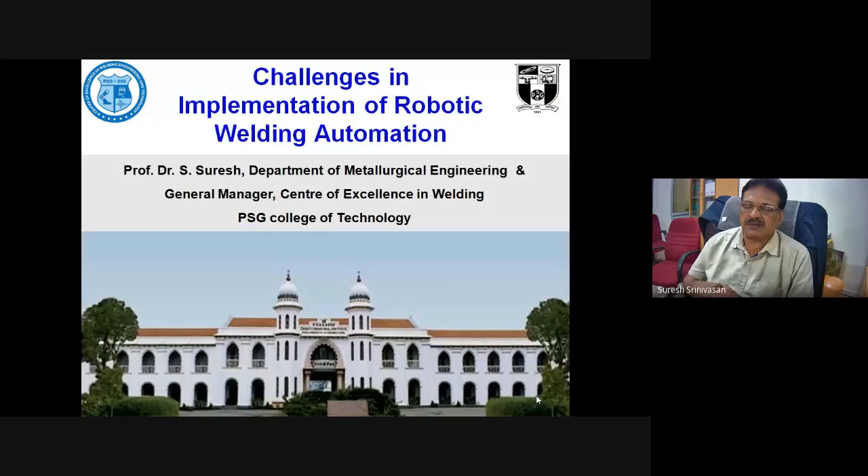In the first part, I'm going to cover the basics, what are all the real factors that we have to consider while we go ahead for implementing robotic automation. So a very brief introduction of our Center of Excellence.

It was a project of Government of India started by PSG College of Technology, wherein three departments are having their tenure. One is the Robotic Automation Engineering Department, headed by Professor Dr. Vinod. I think you would have heard his lecture on the first day.

The second is Professor Sundaram, who heads the EEE Electrical Engineering Department. And third is the Metallurgical Engineering Department head, Dr. J. Krishnamurthy, who is also heading this metallurgy division or metallurgy department.

So I am serving from the industry side as a head for completely installation of all equipments and serving the industry, academics, faculty, and so on. This project was about 27 crores funding, 21 crores coming from government, and 6 crores coming from industries, including PSG industries and so on.

So now we have all the latest welding equipments. I am showing you only the automation equipments. As you see on the slide, we have a gantry robo with both TIG and MIG heads, wherein you could do any kind of experiment.

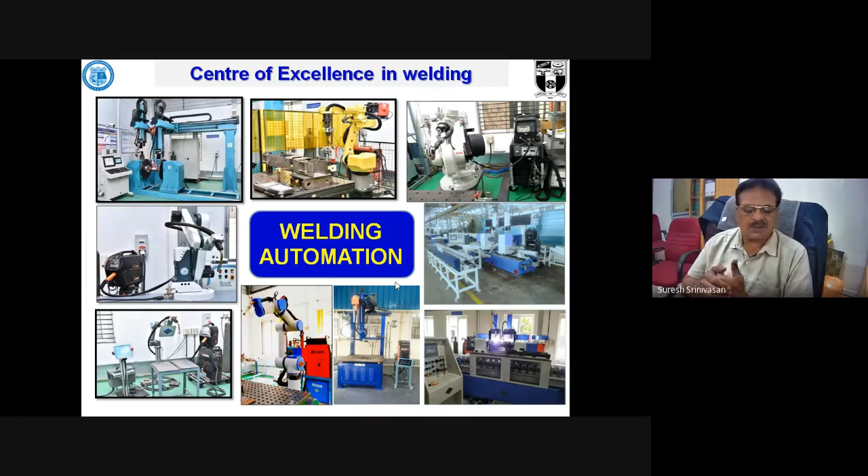Of the other two machines we have built, one is for TIG welding, another for MIG welding of cylindrical jobs, wherein you can do cylindrical welding, linear welding, curvilinear welding, and so on. These are some of the facilities in our center, open to you for usage for your students, projects, etc. We also have several other evaluation and testing equipments. As you see on the left side, is everybody able to see my cursor?

On the left side, you see RoboDK, RobotStudio, and RoboGuide. These are the three simulation packages which we use before we go into an industrial robotic automation product. We run the product through this simulation package to check for interferences, total welding time, movement time, etc. We also have the SysWeld software, which is a finite element software for complete prediction and simulation of welding.

On the next, in the middle, you see three simulation jobs: one for butt welding, another for a T-joint with fillet welding, and the third an actual missile component, where you can do an exact simulation of welding and optimize the parameters to minimize distortion, residual stresses, etc. So the central SysWeld package is for numerical simulation, and the left side is for robo simulation.

On the right side, you see a physical simulation equipment called Gleeble. This is one of the unique features, a very expensive 6 crore equipment which we have in our center, where industry, academia, researchers, and research labs can use it for physical simulation of welding, heat treatment, post-weld heat treatment, hardening, tempering, and effect of tempering. All these can be studied in a small material sample representative of a big job. This is widely used for foundries, casting industries, and welding industries, for simulating heat affected zones, welding, etc. These are some of the research facilities that faculty members, students, and projectants can make use of in our center.

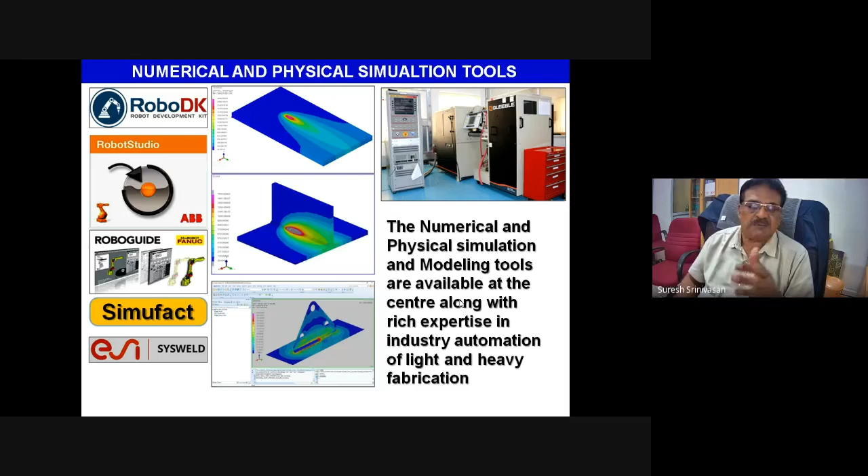Now let us plunge into our robotic welding automation. I think all of you have already become quite wise in knowing what a robot is, what automation is, etc. So I'll quickly pass through these things, as you have already heard quite a lot about this.

As you know, robotic welding makes up about 29% of all robotic applications. If you take 100% of robotic automation, some are for pick and place, some for spraying, some for painting, some for assembly, and 29% of those applications constitute the welding quantum, topped only by robotic material handling. So the number one major application is robotic handling, and the next is robotic welding, which occupies number two in the rank of robotic applications.

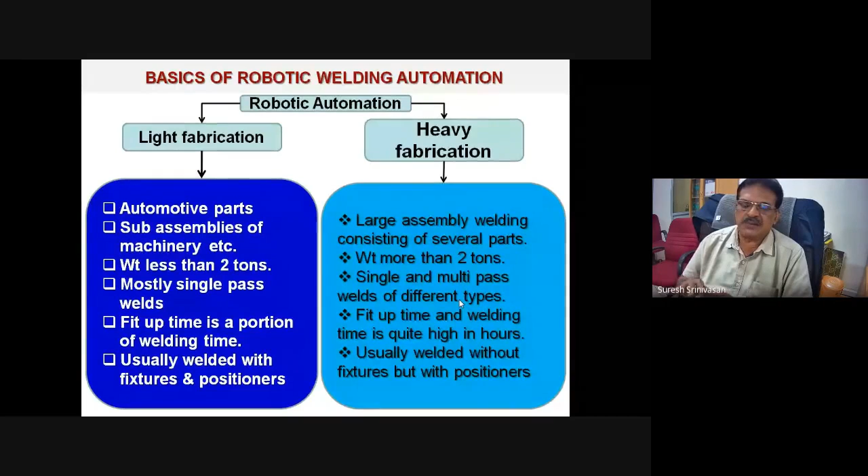Generally, heavy fabrication is welded without fixtures, but with some positioners. When you weld without fixtures, you require really smart systems with a lot of subsystems to overcome the use of fixtures. We'll go into the details as early as possible. But remember, with respect to welding automation, you have to understand and appreciate many small operations involved in production. For example, there are 9 major operations in any automation.

First, we have to load the parts. We have to locate the part in its respective position in the fixture. Then we have to clamp it before welding. Then we have to tack them so that when you turn the job, they don't fall off.

Then you do the welding, then you have to unclamp the assembly. When you do the unclamping, because welding is a unique process, after the weld solidifies, it shrinks. So the assembly may shrink to a little extent, and it may be difficult to remove the assembly from the fixture. So you got to have a plan for this.

Then you can unload it, and further finishing operations and loading of the next part is how the automation goes. Now, if you look at all these operations, when it's done by a man, a welder, a fitter and a group, we call it manual welding. Whereas out of these operations, when some of them can be done with the man and with some fixture, we call it semi-automation. Whereas when you come to fully automated welding, most of them are done by machine and a fixture.

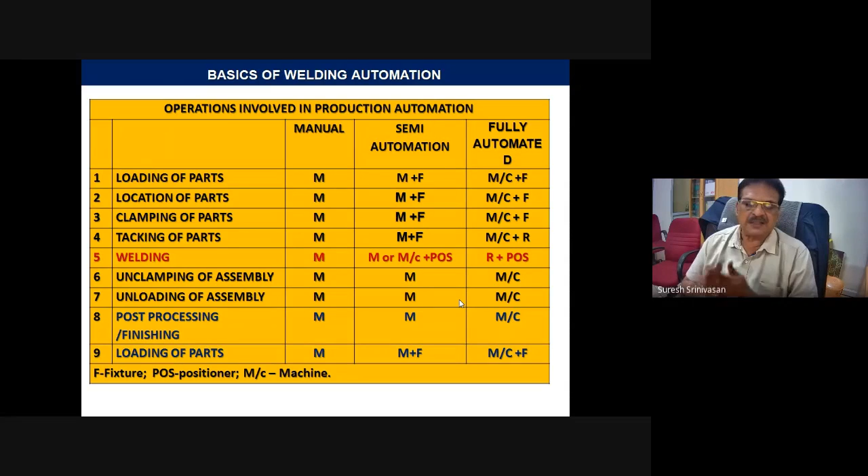So when you go for semi-automation, the man with the fixture is the combination here. And when you come to automatic welding, the man, the welder, the machine and the positioner all play a role. So that means the man machine interface is very, very critical in a fully automated setup.

And if you look at it in further details, there are about 16 steps. If you look at it closely, there are 4 ways in which welding can be done, called type of welding: manual, semi-automatic, mechanized and automatic. So when you say manual, it's very clear.

All the operations like setting up parameters, positioning of the torch, starting of the torch, stabilization of the arc length, maintaining the filler wire rate, guiding the arc - all these operations are done by man, who is a skilled operator.

Whereas if you come to semi-automatic, some of the functions are taken over by the power source, which is a smarter power source today, and the power source program. Very often today, digital power sources come with programs where you don't have to repeat the setting every time. The programs can be instructed, and the program can memorize and apply this program of parameters.

When you come to mechanized, the mechanization helps you guide the torch, position the job, etc., so that welding is done in a more comfortable position.

And when it comes to automatic, what we mean is that as welding progresses, when there are disturbances in the root gap, in the arc length, or in terms of sharp corners, etc., the machine, robot or sensors sense these things and automatically correct the parameters, making it fully automatic. So when you say automatic, the machine should have the intelligence to sense the disturbing factor, take feedback from the real situation, make automatic corrections within a split second, and apply them to the torch, the positioner or the robot such that the welding quality is maintained perfectly.

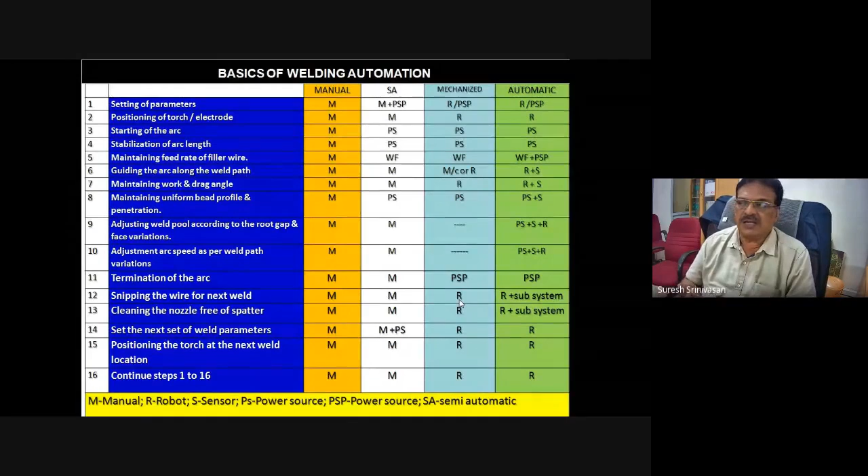So this is what we mean by automation. When it comes to automation, you can have either a special purpose machine or robotic welding automation. In fact, robotic welding gives you several advantages that you don't get with a special purpose machine, though all these things are available even in an SPM, a special purpose machine.

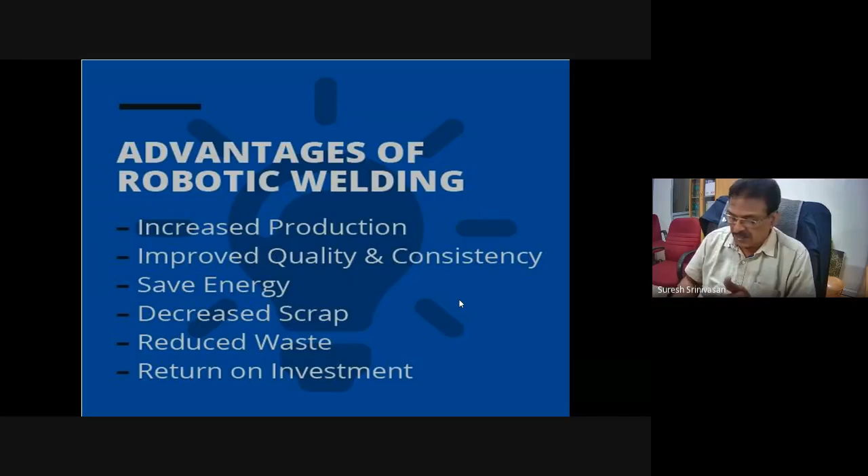The most interesting thing is that it gives you very high flexibility, so any type of job can be done within a few hours of learning and application, compared to SPMs which are customized and tailor-made. The advantages of robotic automation are fewer mistakes, higher production velocity or speed, robots can work 24 hours, all 7 days without breaks, and robots have the highest arc time, or arc-on time as we call it.

Here you have to understand that whenever you do mechanization or automation, when you come to manual welding, you should appreciate that if a welder takes an electrode and starts welding, at maximum an electrode of 450 mm standard length burns for about 1.5 to 2 minutes. So after 2 minutes of welding, he has to change the rod, remove his helmet, and clean the job free of spatter, etc. So he takes another 2 to 3 minutes to do this handling.

Again he starts. So practically for every 2 minutes of welding, he has 3 minutes of unproductive time. If you add these two, it becomes 5. 2 by 5 gives you roughly about 40% arc time. So the production is achieved only as long as the arc is on. When the arc is off, you don't get any deposition, you don't get any welding, you don't get any production.

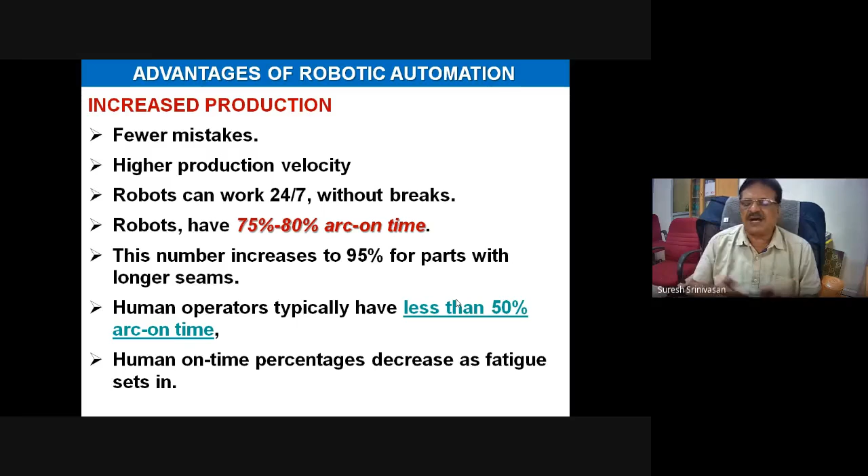So this is the crux of the issue in automation. Secondly, because it's a machine, there is no fatigue of handling the torch several times, going to the same location and repeatedly welding. So your fatigue is absent, and you get improved quality in robotic welding. In fact, I would say more than quality, you get consistency and accuracy in robotic welding.

The quality of welding not only depends on robo, but on many factors which you're going to see shortly. So I would say from my experience, this robotic automation gives you high consistency and accuracy of welding, because the robot places the quality weld in the same spot repeatedly without any fatigue every time. And the precision of these systems also reduces spattering, resulting in neater seams, lesser post-cleaning, and so on.

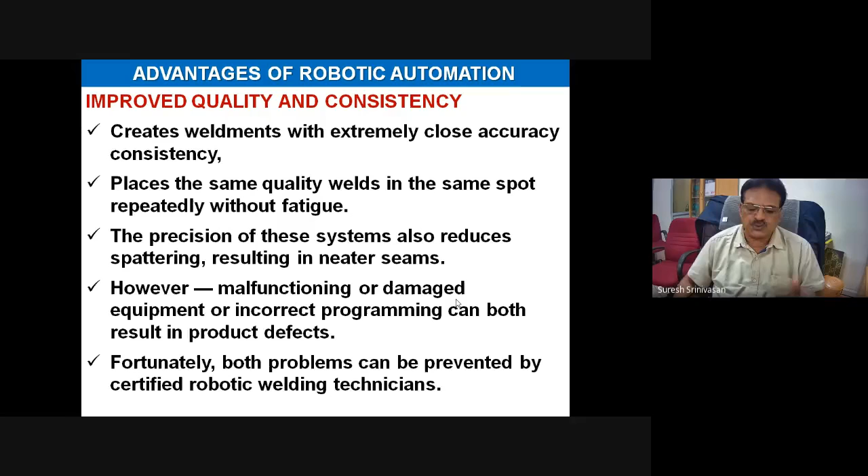Please remember, all these statements are true only when there is no malfunctioning or damaged equipment or incorrect programming. All these things are eliminated from the scene. So if proper programming is done, a good fixture is available, and there is no malfunctioning, then whatever the previous three statements are true. Fortunately, all these issues can be prevented by certified robotic welding technicians and operators. Incidentally, our Center and Robotic Automation Engineering Department also gives training to any robot operator with which he can easily do the robotic automation. Next one is saving of energy.

It conserves a lot of energy by running consistently, cutting the energy-expensive startups, and they do not overweld, and they do a consistent quality weld. When they do not overweld, the filler material wastage is prevented, so energy for welding is also minimized, and they reduce the need for corrective welding.

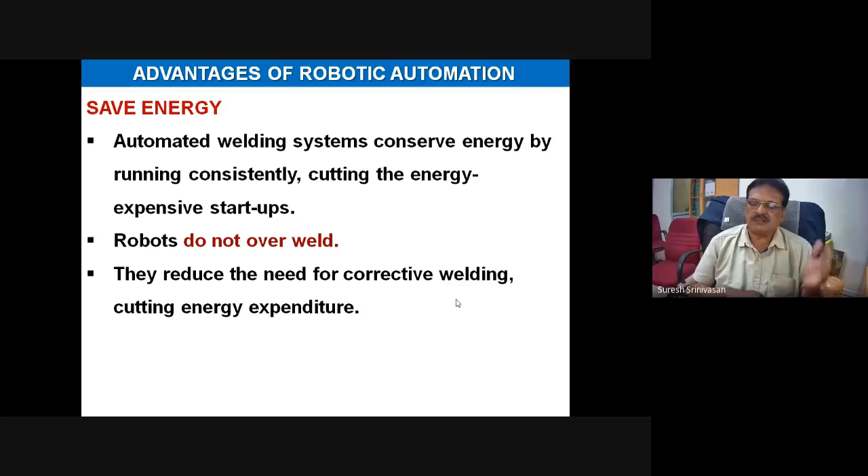Now, rework percentages. For example, if you take manual welding, you get a rework percentage of 10 to 15%. When you come to mechanization, you can get around 5 to 10%. When you go to robotic automation, this rework can be reduced to below 5%. So there is a drastic reduction in rework from 15% to below 5%. That is another great saving for your automation, and reduced wastage.

When you have increased welding speeds and minimize excess energy, it increases the lifespan of consumable equipments, like you have a lot of accessories like guiding torch guides, contact tubes, etc. And consumables are yet another source of wastage. Consumables in robotic welding includes nozzles, guide rolls, guide tubes, etc., which have relatively short lifespans that are replaced after a number of uses.

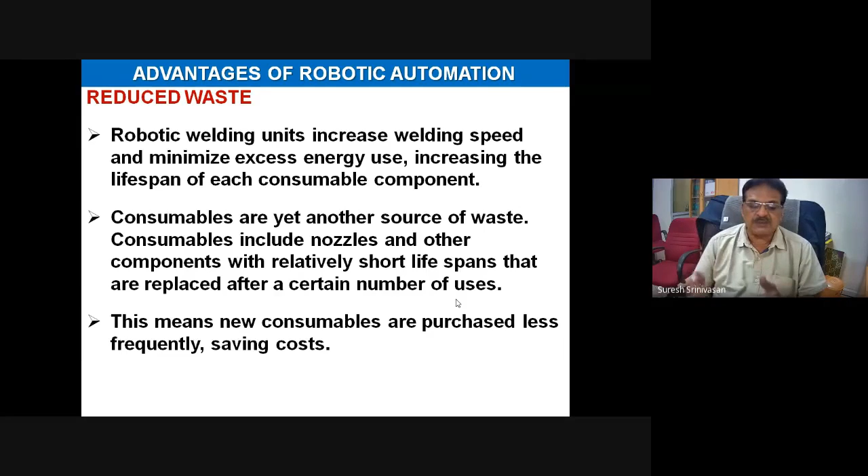In fact, consumables, remember, in welding, consumable costs 3 to 5 times the cost of a base material. So every kg of consumable material saved gives you a big advantage in terms of cash outflow. This means consumables are purchased less frequently, saving costs.

Return on investment. Finally, why should we go for robotic automation? The efficiency, accuracy, and cost savings — all three give you a very big advantage, and it is more than the initial setup cost, which could be high. The combination of greater speeds, higher quality welds, and decreased scrap all gives you a quick return on investment. It increases further when you consider reduced energy costs, minimize chances of overwelding.

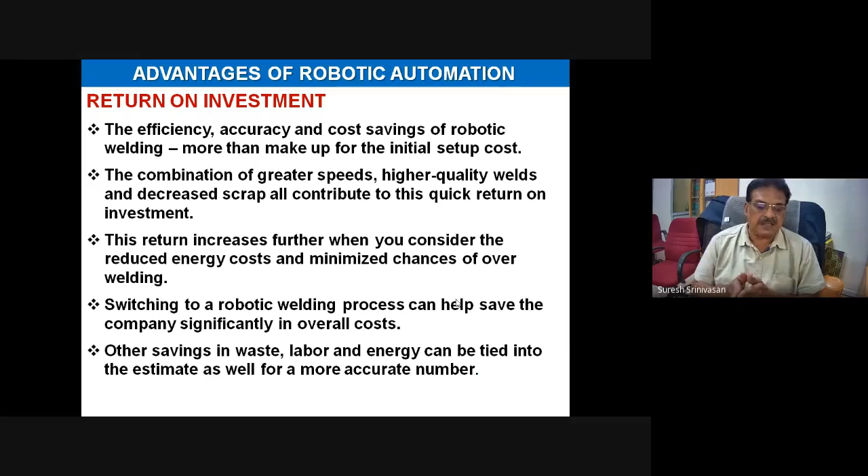Switching to a robotic welding process can help save the company significantly in cost, and other costs, of course, include labor, energy, etc., which are tied to this.

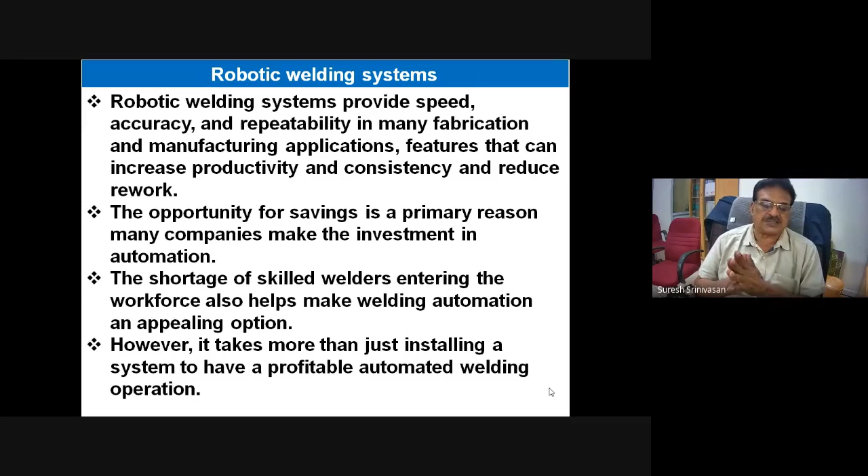One simple solution is to replace the welders with a robotic welding system. You can easily operate the welding system with an engineer - you no longer need a skilled welder, so you are free from such issues. But it takes more than just installing a system to have a profitable welding operation.

Now let us look at the various systems in a robotic welding automation setup. Number one on top is the robot. The next is the robot - we have to integrate a welding power source with the robot. Next, we need peripherals to assist robotic welding. These three are essentials for a basic robot.

If you want a smart or intelligent robot, as intelligent as a skilled welder, you require sensors. So all these are on the right side. Going in the clockwise direction: the robot, power source, peripherals and sensors. These are all part of the robotic welding system.

The next requirement is a fixture - this is for the job, and it varies from one job to another. The right side four remain constant with any type of application, whereas the fixture varies from one component to another, one assembly to another. So fixtures have to be customized for the specific application or job.

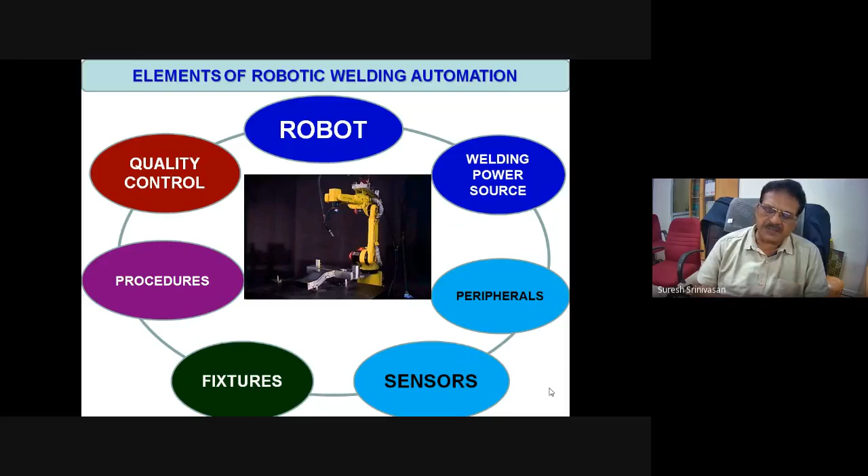Of course, zero defect is our destination, which any industry wants to achieve. It is something like perfection, and it depends on so many factors like material, consumable, parameter settings, sequence, etc. The quality control function is compatible with robotic systems because rework percentages are reduced to less than 5%. The quality control task itself becomes easy, the manpower for quality reduces, and the cost of quality reduces with robotic welding automation.

Now let us go one by one. The welding robot - you would have already heard about this for the past 3 days. You have floor mounted robots, side mounted robots, gantry mounted robots, hanging robots on the gantry, side mounted gantry, etc.

Generally, a robot is specified in terms of length, height, and width, or what you call the reach or sweep of the robot on the fixture or table on which the component is clamped. The reach of the robot is to be chosen to cover maximum weld locations in the assembly. Sometimes if the robot reach is not adequate, we may have to reset the component twice, and lots of errors can occur here. So when you select the robot for a given set of assemblies, you have to be very careful in deciding the specification of the robot reach so that all planned components can be welded.

The next issue in welding is payload of the robots. For example, TIG welding, MIG welding, CMT welding, and today many new welding processes have emerged, some involving specialized torches. These torches weigh anywhere from 1 kg to 10 kgs, including specialized torches along with filler wire feeding guides - these hardwares could vary from 1 kg to 10 kg. So the payload of the robot for welding is normally between 5 to 15 kgs, so that any type of torch can be handled in the system.

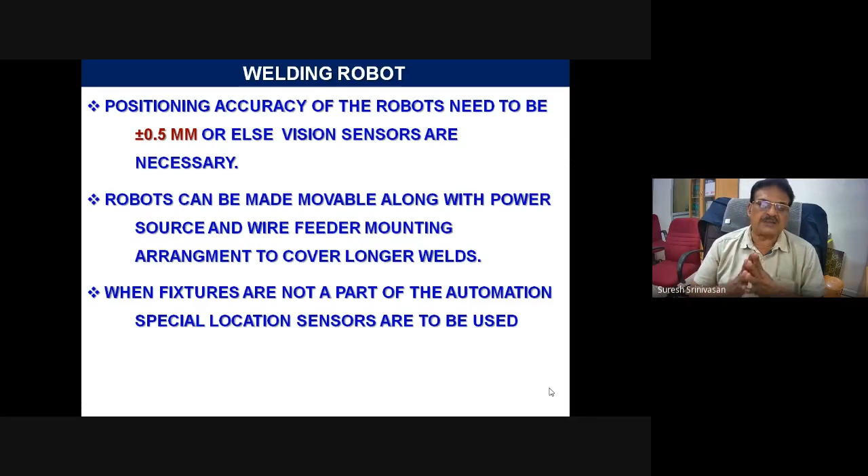Thirdly, when fixtures are not part of the automation - suppose you don't want to use a fixture - remember, special location sensors are to be used. We'll come to that in detail as we go along.

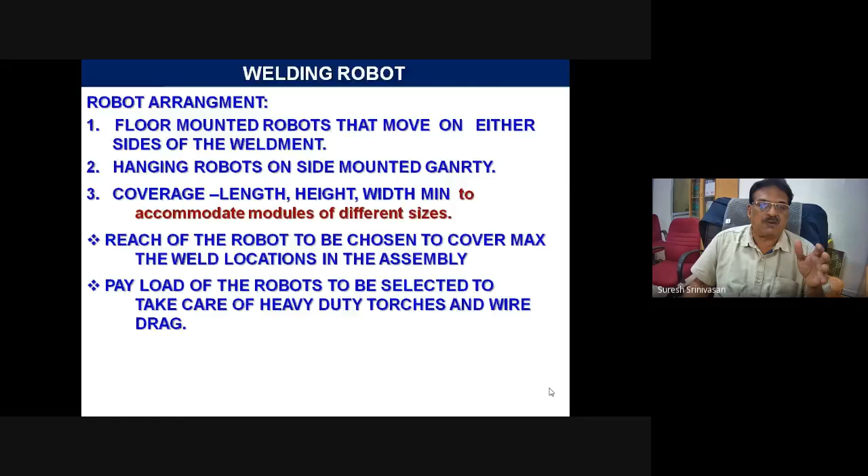Now, with respect to special requirements of the robot, we have seen two slides. Now coming to power source - you have already heard the lecture by Dr. Murugan, who is an expert in gas metal arc welding. You would have already heard about the basics and the processes involved in robotic welding, which today includes GMAW, GTAW, plasma welding, and so on.

Now coming to GMAW - this is the process widely used in industry for robotic welding automation. About 80% of arc welding robots use this GMAW process. This gas metal arc welding process refers to the use of both inert and active gas, or a mixture of active and inert gas combinations. When you use only an inert gas, we call it MIG welding. When you use a mixture gas or CO2, we call it MAG welding - so this gas metal arc welding covers both active gas and inert gas for shielding.

When you buy or specify a power source for robotic welding, remember the robot can work 24/7 continuously with a high arc time of 75 to 80%. So your power source must be 100% duty cycle. Generally, power sources are designed for 60% duty cycle, meaning you can operate for 6 minutes with a rest of 4 minutes—6 plus 4 is the cycle time, so 6/10 or 60% is the duty cycle. Whereas in robotic automation, since arc-on time can be 80% or even 90%, we need a welding power source with 100% duty cycle.

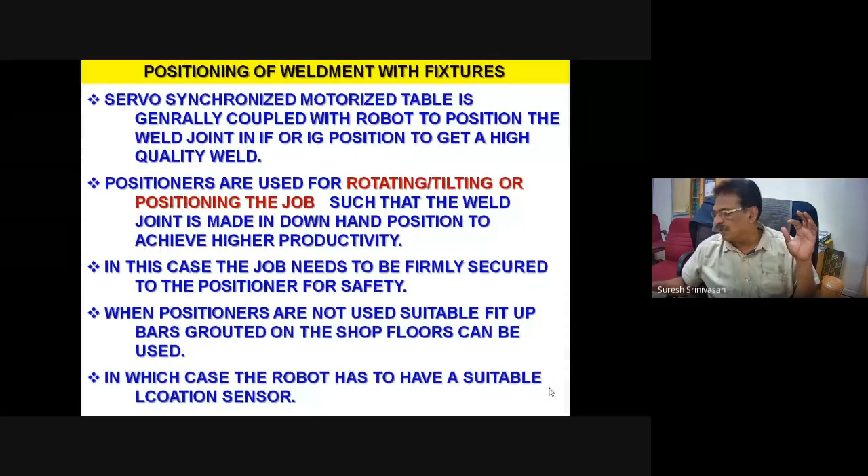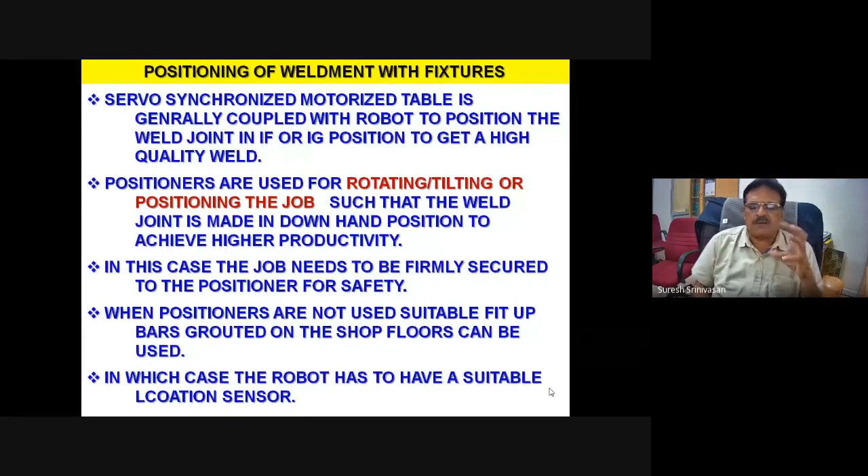Now coming to the fixture and the positioner. As you know, in welding, downhand welding gives you the highest quality welding, so the robot can adjust itself to any position of welding. But sometimes, if the robot itself goes and adjusts itself to various positions and locations, it may take more time, and the arc-on time for the robot may get reduced. So in order to enhance the arc-on time of the robot, we also have a positioner which is servo synchronized. That means its motion is synchronized with the robot so that they both move in tandem to the right position, so the robot's unproductive time of moving from one place to another is minimized. The positioners can be rotating type, tilting type, etc., so that welding is done in downhand.

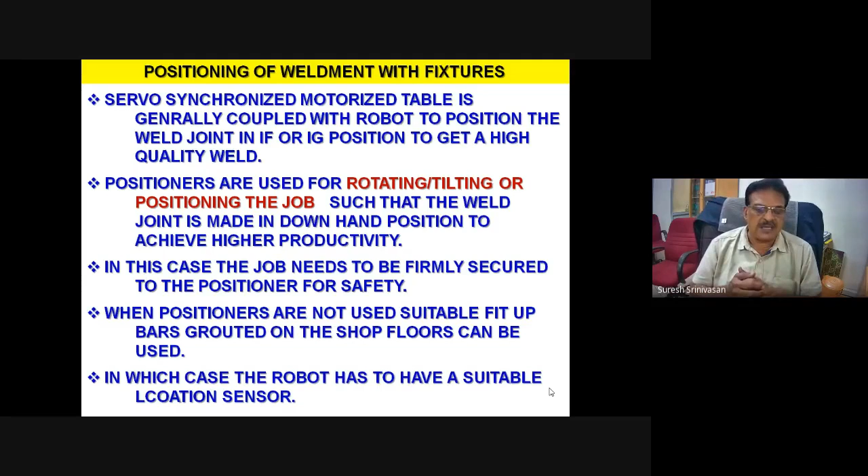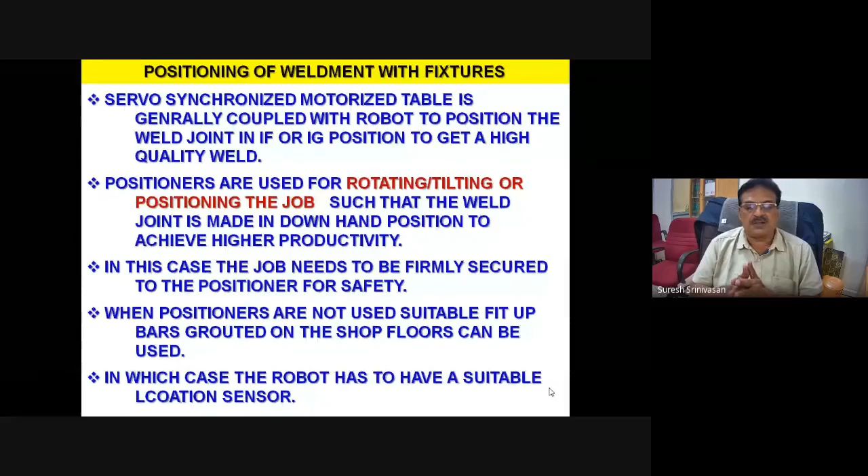But remember, when you do robotic welding on a positioner, if the job is heavy, it may fall on the operator. So for safety, it has to be secured firmly to the positioner. When positioners are not used, suitable fit-up bars grouted on the shop floor can be used. The robot has to have a suitable location sensor.

Now, coming to peripherals, these are additional equipment that gets integrated with the system. They can maximize the performance and increase the arc-on time, increasing productivity and return on investment by improving the performance, lifetime of consumables, and minimizing defects.

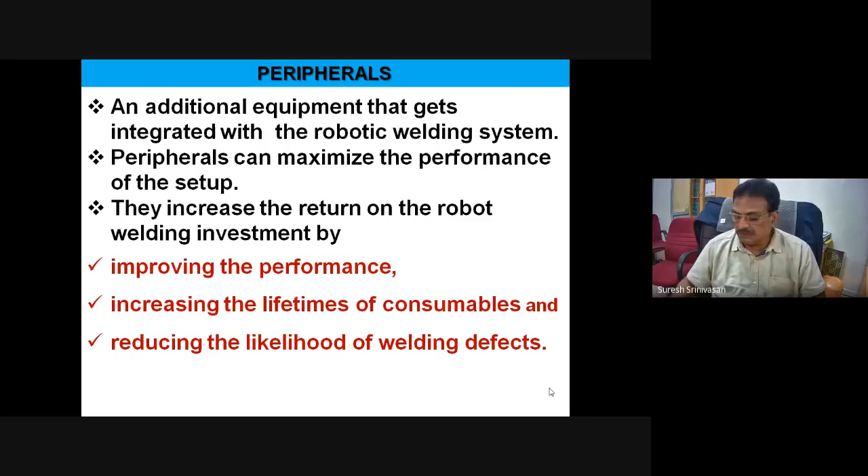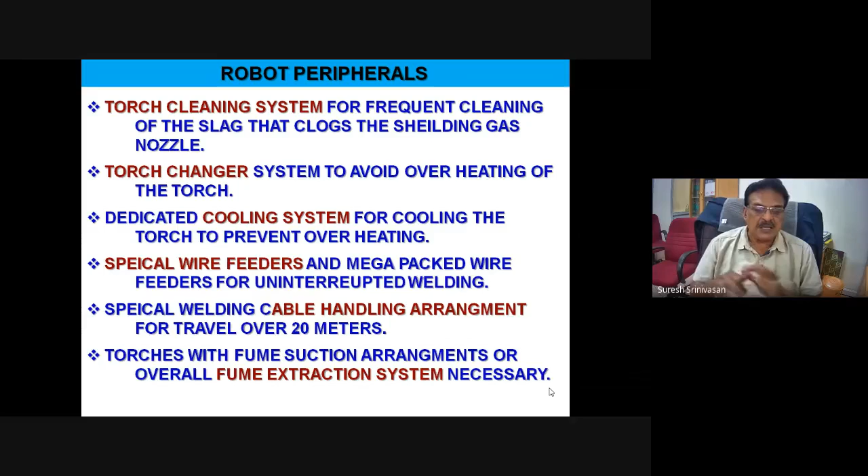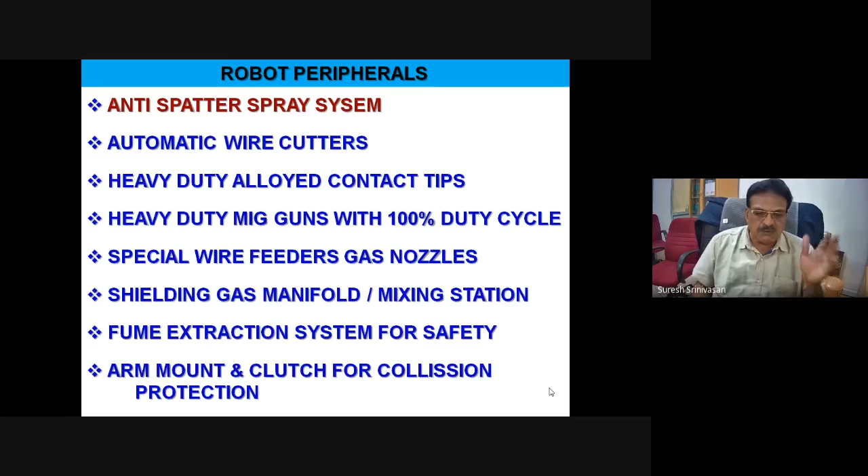The peripherals include torch cleaning, torch changing, cooling systems for the torches to prevent overheating, special wire feeders so that wire feeders need not be changed frequently, cable handling arrangements when you do very long, say 20-meter welding, torches with fume extraction systems, anti-spatter systems, automatic wire cutters, heavy-duty alloyed tips, heavy-duty MIG guns, special wire feeders, nozzles, shielding gas manifolds—because if you try to handle individual gas cylinders, during the changing of cylinders time will be wasted, unproductive time will increase, and arc-on time will reduce—fume extraction systems, and arm mounts and clutches for collision protection. So all these are peripherals which are used extensively.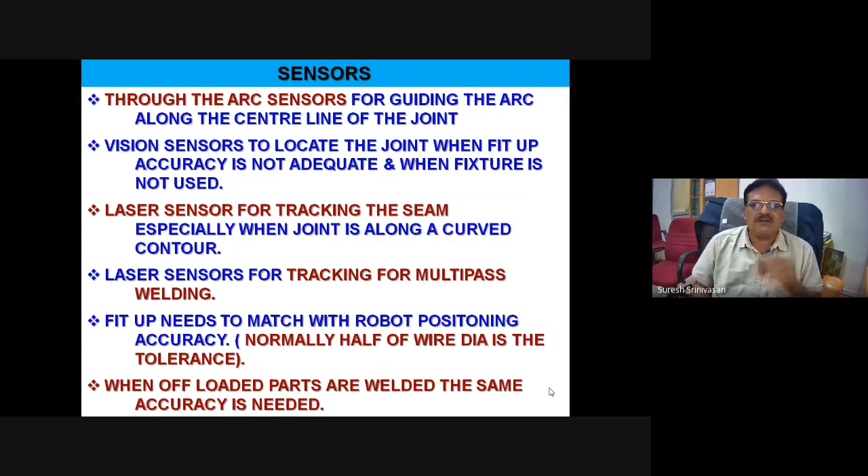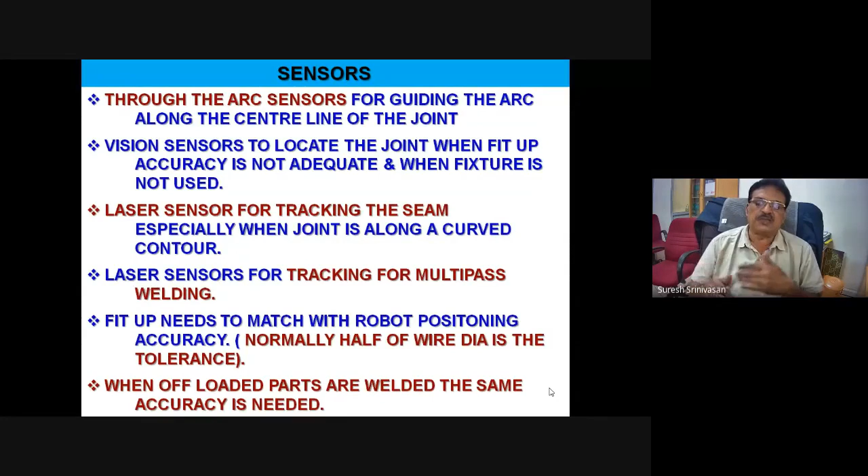Coming to sensors. Whenever you want to do an intelligent or automatic welding, remember the robot is not intelligent, it is an unskilled fellow. The robot becomes intelligent only when sensors are added by way of arc sensors, vision sensors, laser sensors for tracking the seam, vision sensors for location, and laser sensors for tracking multi-pass welds. Fit-up needs to match robot positioning, and when offloaded parts are welded the same accuracy is needed. So any company that goes for offloading of sub-assemblies—different suppliers give different tolerances—so the robot has to distinguish through its sensor by intelligence. So all these are required.

So here I would like to explain the difference between jig, positioner, and fixture. A jig is a device to locate parts relative to one another as per the drawing. A fixture is a device that holds the parts and enables manipulation of the assembly till either tack welding or full welding is completed. Positioners enable the job to be brought into downhand or comfortable welding positions to increase arc-on time. Manipulators or robots handle the tool; positioners handle the job. The robot is a big manipulator—a programmable manipulator. A fixture is a device that holds the part.

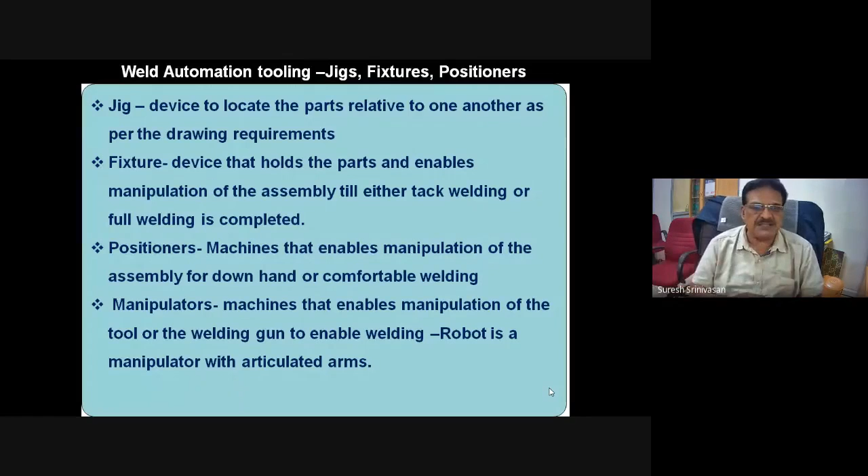So the significance of robotic tooling: the major issue or challenge in any robotic welding is the tooling. If you can design proper robotic tooling, including fixtures etc., your arc-on time will be very high. So the welding robot system entirely depends on tooling. Generally, it is overlooked, trivialized, and under-budgeted. Tooling is an important interface between the robot, the workpiece, and the operator. Remember, tooling decides the quality of the welded part.

Generally, when we establish these robot systems in so many industries, we found that if the robot system costs about 2 crores, the robot alone costs only 30 to 35%. 65 to 75% of the cost goes for the tooling, accessories, and peripherals. So the robot is cheap, but the robotic system is costlier.

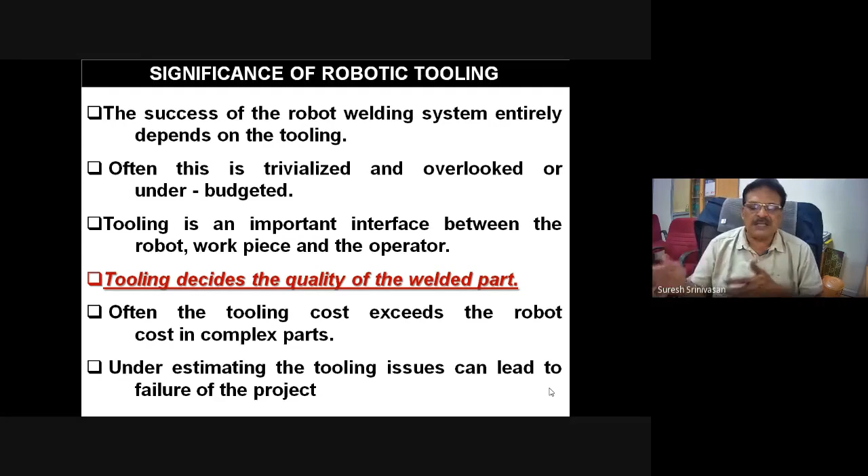Underestimating the tooling issues can lead to failure of the project, and people start blaming the robotic system rather than the intelligent systems. Fixture is mandatory for robotic welding, as the welding torch traces the location and path once taught repeatedly. So for every job, suppose if I am welding 100 jobs per hour, we don't need to teach the robot every time. Once you teach it, the robot goes to the exact location and starts welding repeatedly. To do this, fixture is mandatory.

The robot does not recognize the deviation of the weld location, if any. Suppose in the component you have not fixed one bracket, the robot does not recognize that. It goes there and welds even though there is no component there. Please note that — that is where the sensor works.

Fixture is mandatory as the assembly may deviate during welding. This is one of the unique characteristics of welding. As you start welding, thin sections start distorting, twisting, shrinking, and so on. So suppose the job requires some 36 joints, after the 10th to 15th joint, the 16th to 17th joint may undergo deviation due to the previous welding of 14 members. So this is a problem in welding.

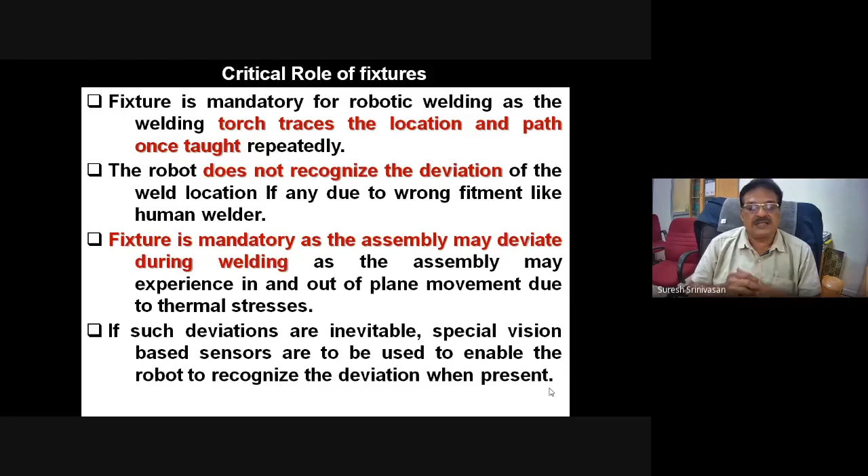Sensors become a must when you experience certain problems. Or fixture is a must in cases where deviations are not permitted. The fixture holds the members firmly without them going out of position. When such deviations are inevitable, special vision-based sensors are used to recognize the deviation when experienced. With these fixtures, the measurements required for the operator with respect to location are minimized, improving identification and enhanced fit-up of workpieces to obtain tighter tolerances.

For successful robotic automation, fit-up is the most important factor required, because fit-up tolerances have to be very closely maintained — it cannot normally exceed the robot welding wire diameter. If the wire diameter is normally 1.2 or 1.6, generally you have to keep the tolerances within 1.6 millimeters. If the tolerance exceeds 1.6, your productivity or on-time will reduce.

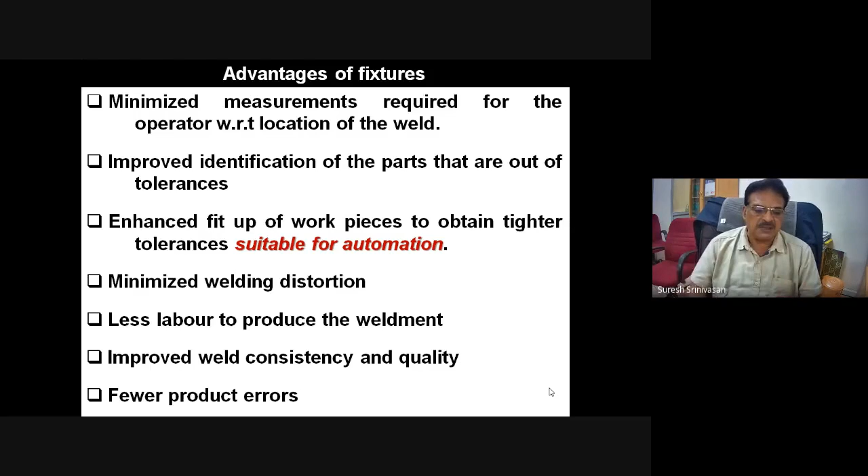Sometimes the robot itself can give you lower productivity than manual welding because of poor fit-up. Because the robot cannot recognize the deviation, it will simply weld, producing a poor quality weld. So fixtures give minimized welding distortion, less labor, improved weld consistency, and fewer product errors.

Most important, fixture design is when parts are firmly fixed, weld locations are fixed. If not, the robot may start welding in a wrong position. This is all the more essential in welding robots, as weldments may distort during welding.

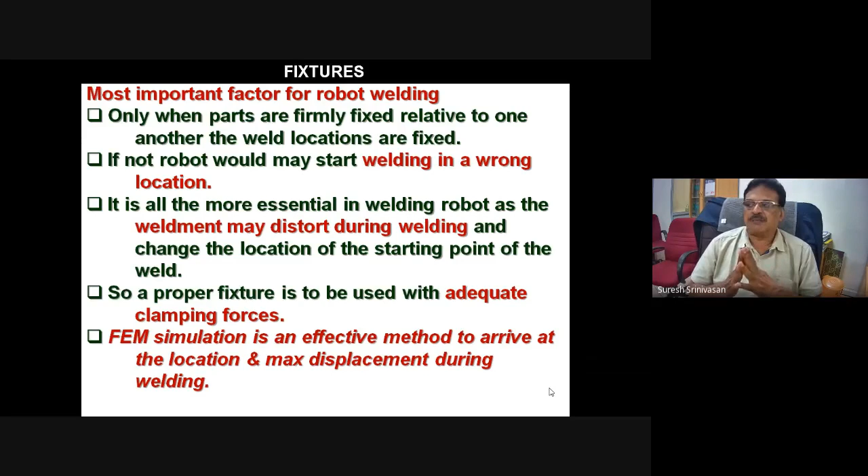So what we do in our center is, before the robotic automation, we run an FEM simulation using SysWeld to know the effective deviations that may arise during and after welding, and design the fixture so that robotic automation is successful. So we use SysWeld and robotic simulation as a prerequisite for robotic automation by FEM. This is our strategy.

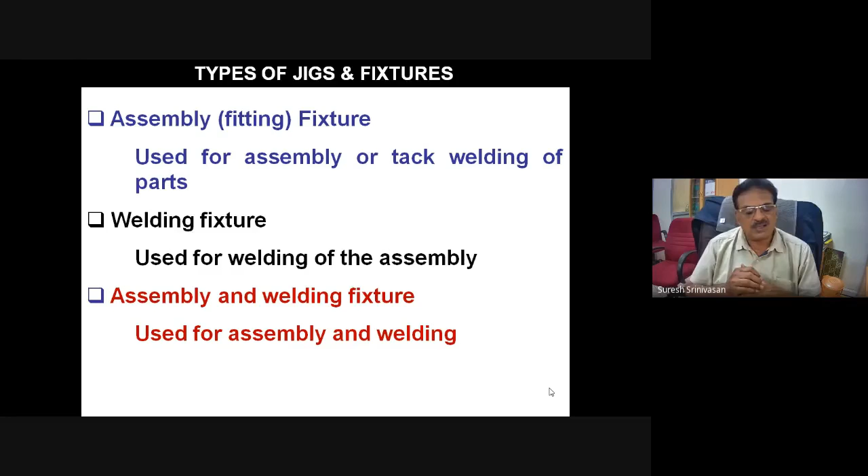After that, we use the assembly fixture. Sometimes we assemble the parts in a fixture and take it to welding, or in the same fixture we can assemble and weld — both can be used. So when it comes to assembly and welding, you have to load the parts, locate the parts, clamp the parts, handle the parts, tack weld the parts, and so on. That is why we call it assembly fixture, welding fixture.

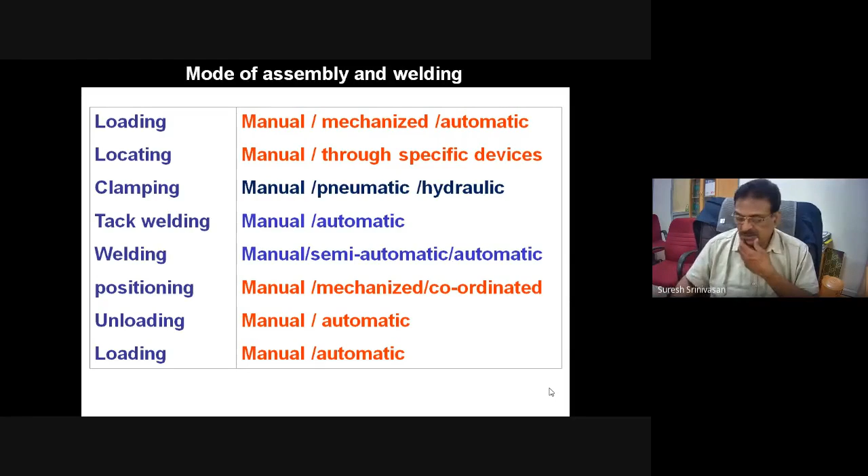After welding, very often in automotive industries, the welded part is put on an inspection jig and tested. So any one of these operations can be manual, mechanized, or automatic — loading, locating, clamping, tack welding, etc. Any one of them can be in all three modes. So when you say fixture, you have to locate the part, clamp the part, and tack weld the part.

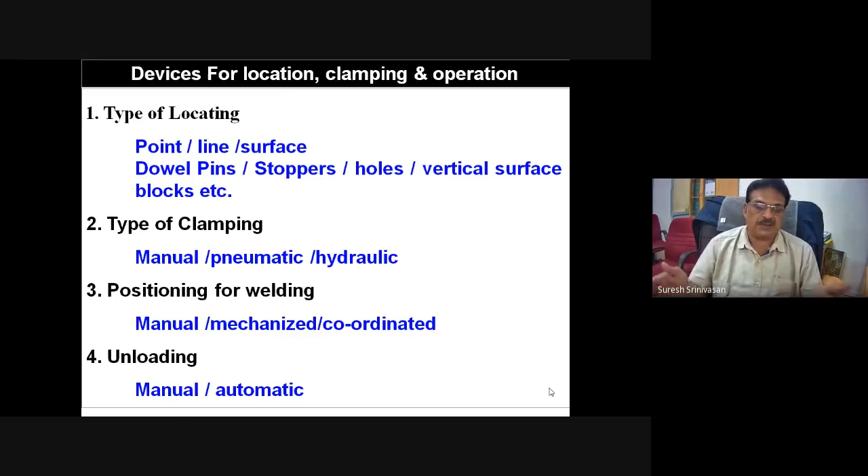Location can be point, line, or surface — you could be using dowel pins, stoppers, holes, or surface blocks. Clamping can be manual, pneumatic, or hydraulic, depending on the takt time. Positioning could be manual, mechanized, or coordinated. All these could be designed.

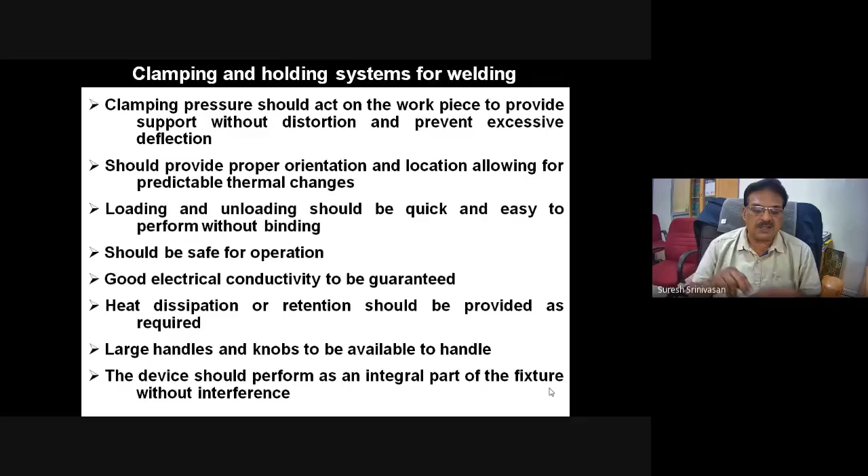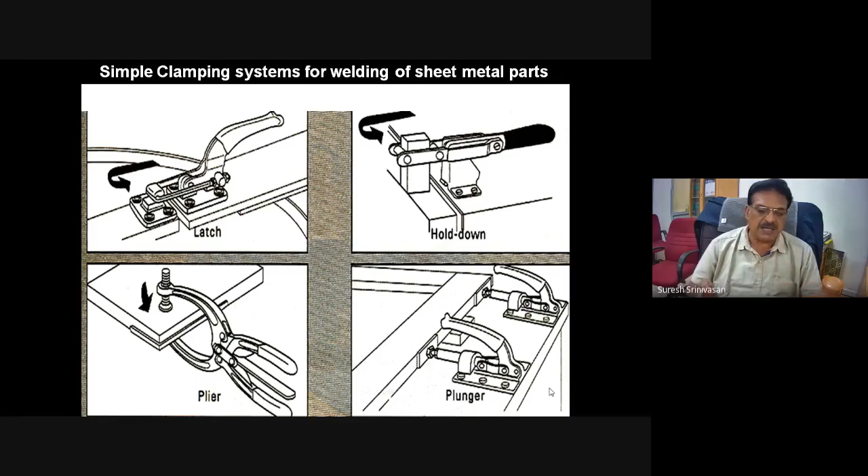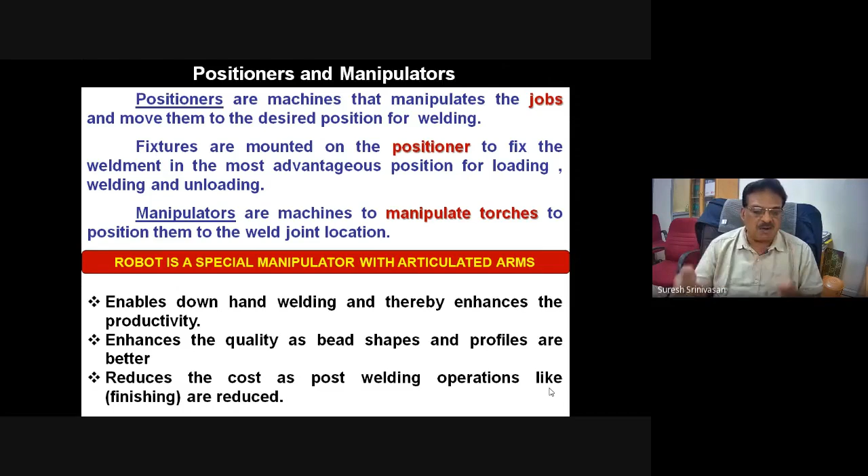Generally, simple clamping devices like latches, hold down clamps, pliers, and plungers are used for holding the parts. Positioners and manipulators—as I told you, positioner is for the job, manipulator is for the torch, and a robot is nothing but a special manipulator with articulated arms, which is programmable and uses repeated operations.

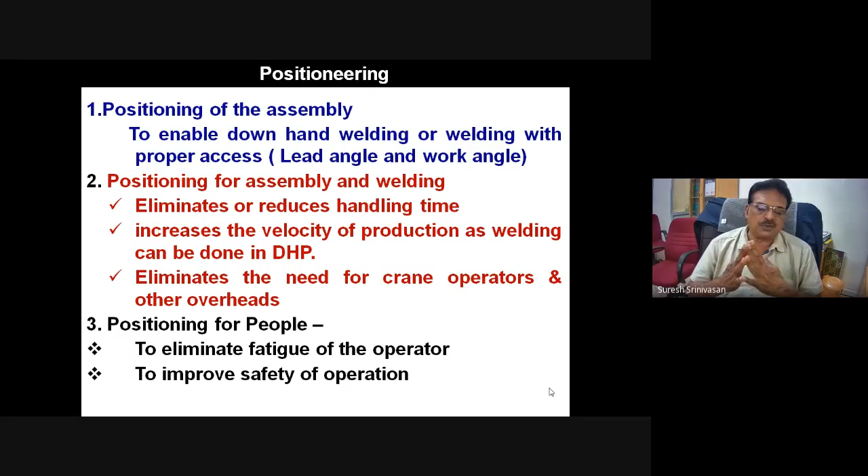So when I say positioning, what I mean is positioning of the assembly to get to the right lead angle and work angle for welding, for reducing the handling time, increasing the velocity of production, eliminating the need for crane, etc. Positioning could also be due to reducing fatigue for the people or for safe operation.

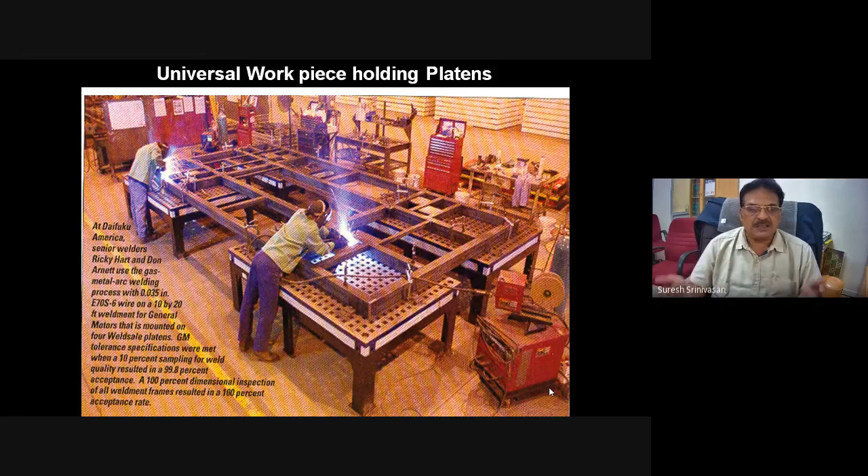So several types of positioners like turntables, columns, winches, robots, etc. are available. This is a simple universal workpiece holding platen where you have slotted tables where it's all leveled and beautifully done, and such frames can be easily welded by clamping the frame and welding it very easily.

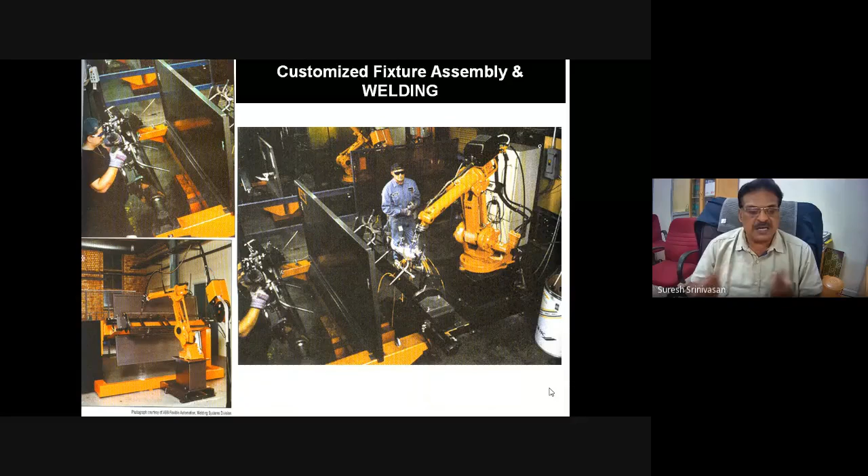Whereas for certain kinds of customized assembly, you can see the robot with a fixture. The fixture is kept on a positioner which rotates and tilts itself to enable downhand welding. And sometimes we use such clamps for holding the parts.

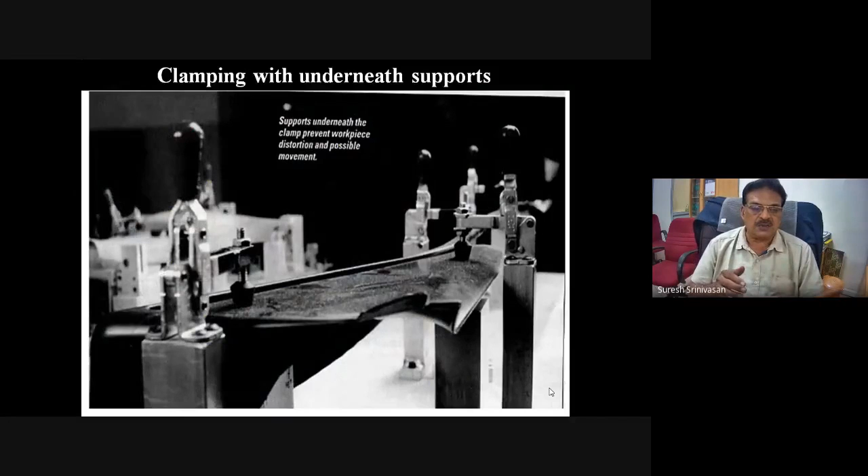It could be either manual or pneumatically operated. As you see here, you are able to see a manual clamping of the fixture, whereas sometimes we use pneumatic clamping. Here you are able to see a full frame assembly in a fixture manually clamped.

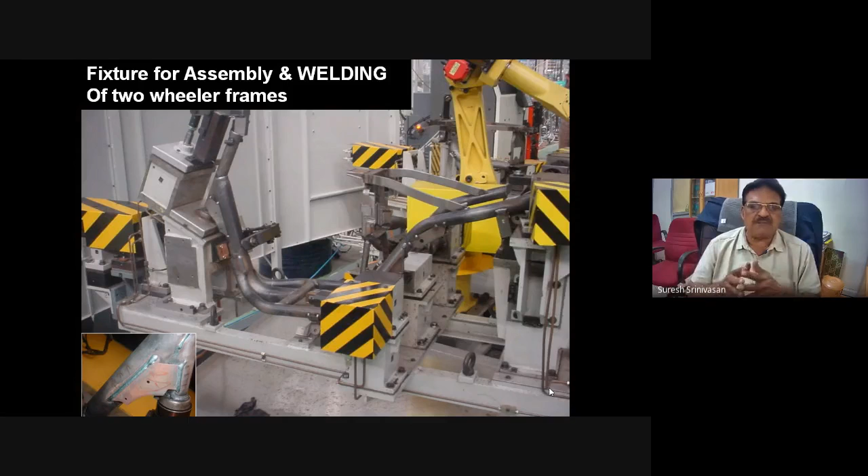And here it's a glimpse of what I'm going to show you in the afternoon. It's a typical two-wheeler frame called Scooty Pep. Here we have designed a fixture for TVS. We have implemented this robotic automation. So I'm going to talk to you a lot on this.

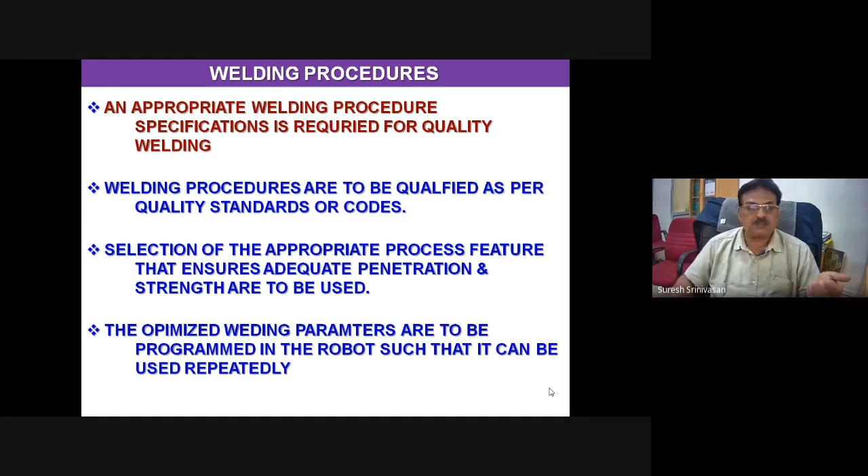Coming to procedures, as I told you, we require procedures for guaranteeing the weld metal properties meet compliance with the standards or codes, and all this has to be tested as per different codes. A suitable quality plan and procedures are to be applied, and depending on the type of weldment, either sampling or 100% checks are made, using even proper jigs sometimes. So quality establishment through one-off trial is essential to control weld quality. All these ought to be established.

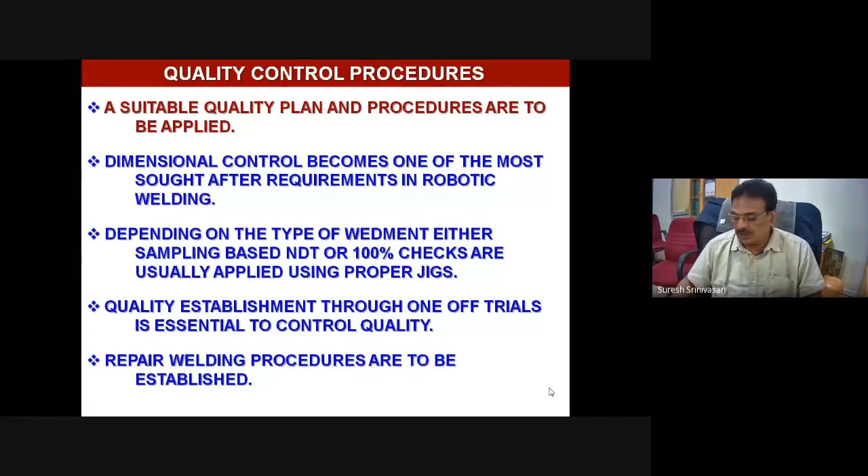Coming to the challenges, remember any component used—plate, rolled, formed sections, could be cast, could be wrought, etc.—each one of them has different tolerance limits. So several types of welds are carried out: single, multi-pass, fillet, lap, butt joints, etc. And you require positioning of the weldment to bring the component to downhand welding.

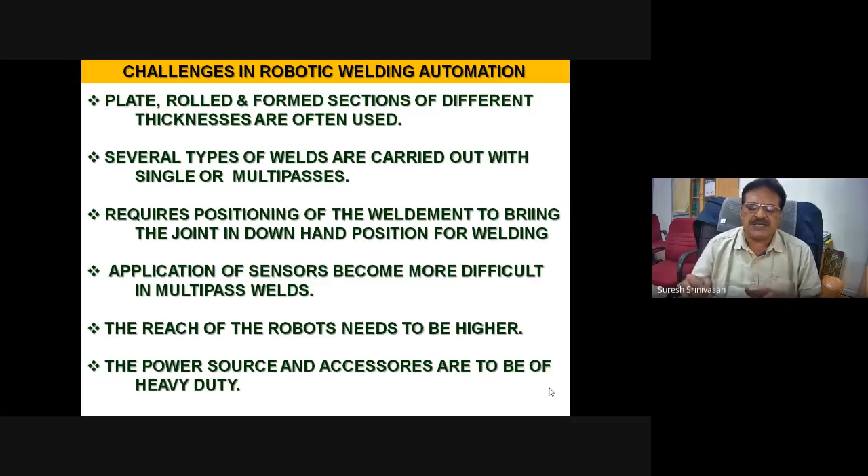And when you apply, the sensors become more difficult in multi-pass welds. That is a challenge. And the reach of the robots needs to be higher because the torch has to be held at a specific angle called the lead angle and the work angle, so that the fillet size will be equal in both horizontal and vertical directions.

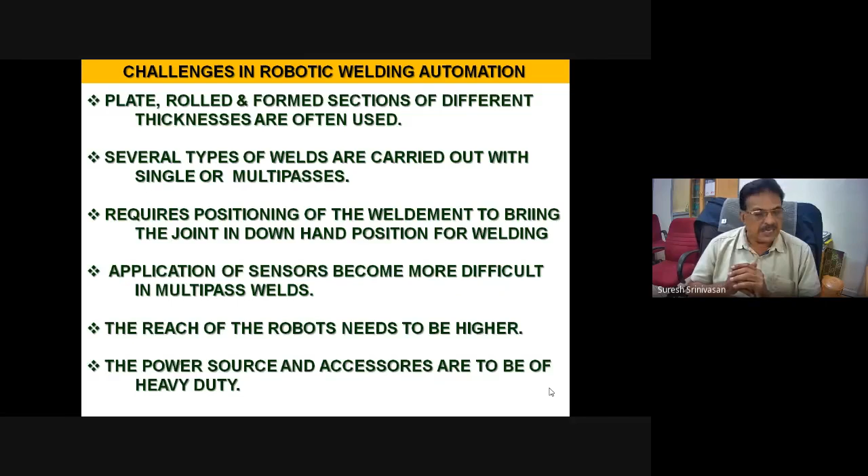The power sources or accessories have to be heavy duty, as we have seen, and power source capacity has to be higher with heavy duty cycles because it's going to work for a longer time. It is preferable to use flux-free, spatter-free processes which don't require cleaning, etc. Heavy duty torches are to be used.

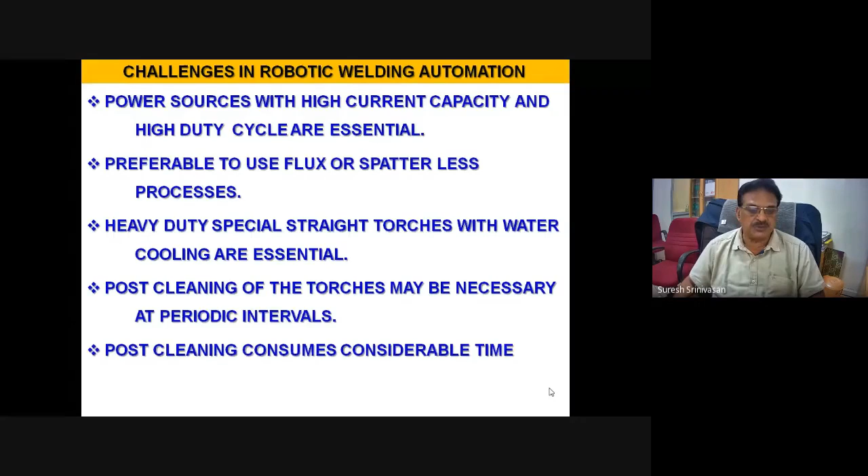Post cleaning of the torches may be necessary at periodic intervals, etc. And special high torque wire feeders are essential. All these things we have seen already, so I will rush through.

Nearly each welding project needs a customized fixture. Robots are almost invariably off the shelf—readily you can buy the robot from a supplier—while each tool is designed and built for the job. The robot is off the shelf available, but the robotic system is not available off the shelf.

A tool builder often gets very little time to design a tool. Careful planning and foresight must be applied to resolve the tooling issues. Tooling design and performance depends on many factors like welding access.

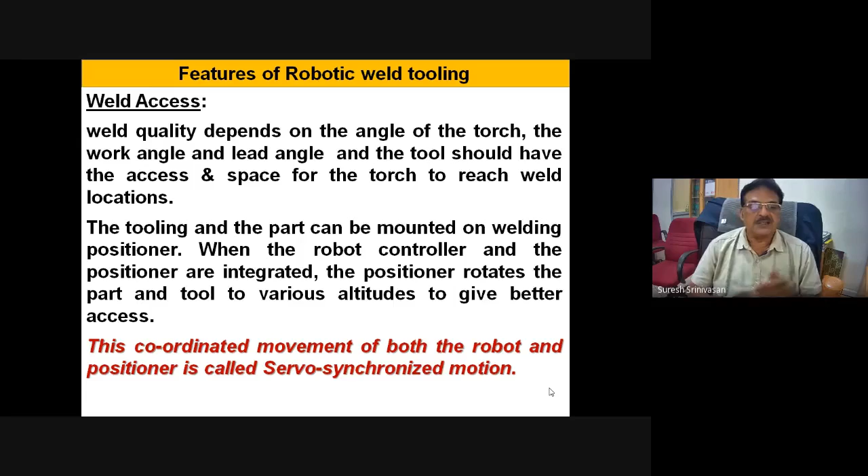You require a coordinated movement or servo synchronized motion for the robot and the positioner to get the right quality of welding. Repeatability, as I told you, plus minus 0.5 accuracy, and fixture—sometimes with vision-based sensors and seam tracking—are required for repeatability.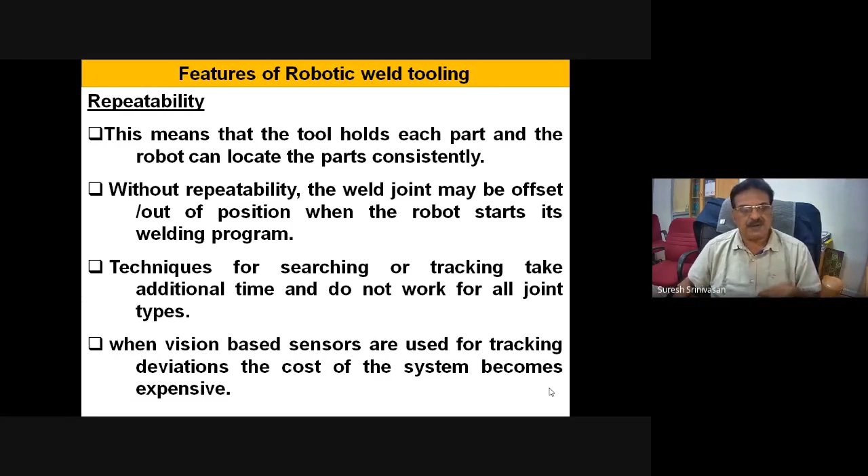And the robot system tooling must be operator friendly, maintenance friendly, and should be rugged because heavy duty welding, spatter, etc. may cause problems. Generally in the automotive industry, we change the tooling system every once in 2 years because of the wear and tear of the system.

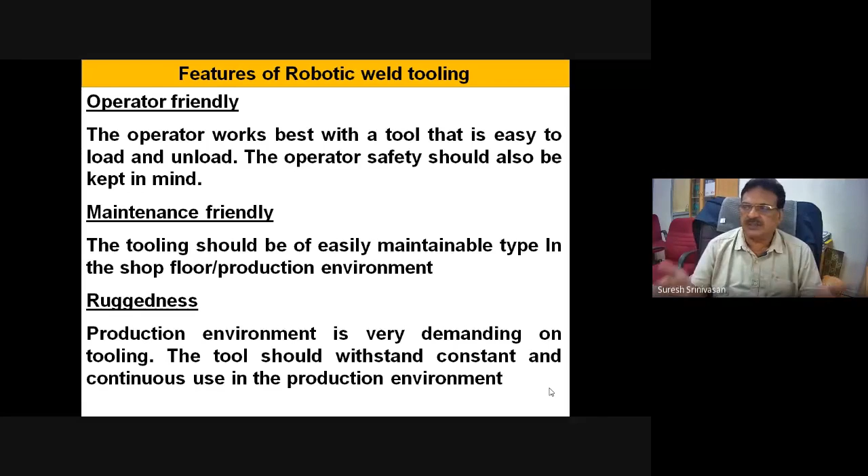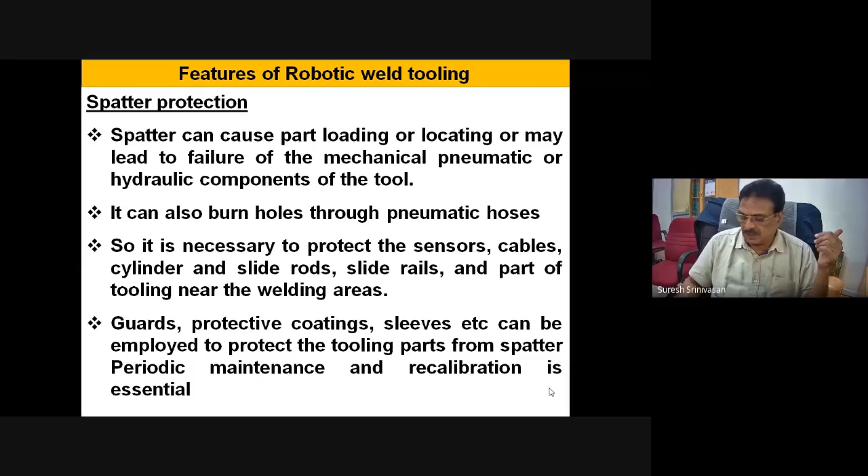Spatter protection is a must because compared to a machining fixture, welding always involves spatter, so spatter can cause part loading issues, etc. All these things are a must, along with adjustable datum and quick change features.

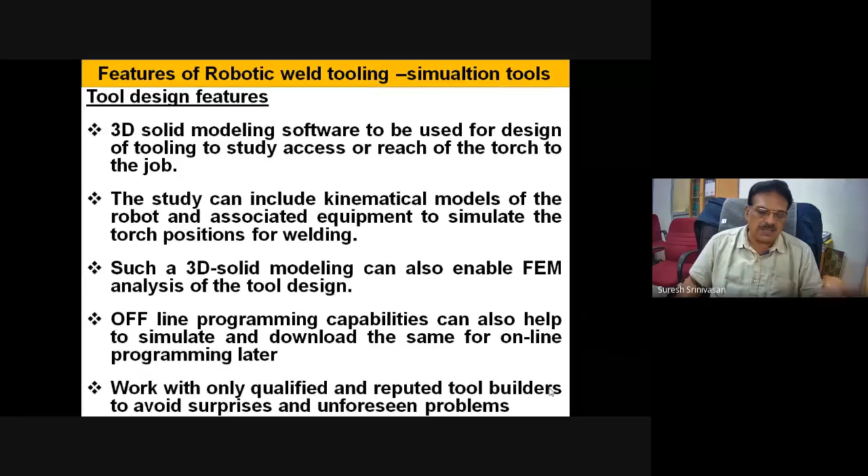So we can have a single tooling for a family of parts, on tooling on the welding positioner, and tool design features like 3D modeling, 3D solid modeling, SolidWorks, offline programming. All these are possible. Here we use robot simulation packages like RoboDK, Robot Studio, which are available in our center.

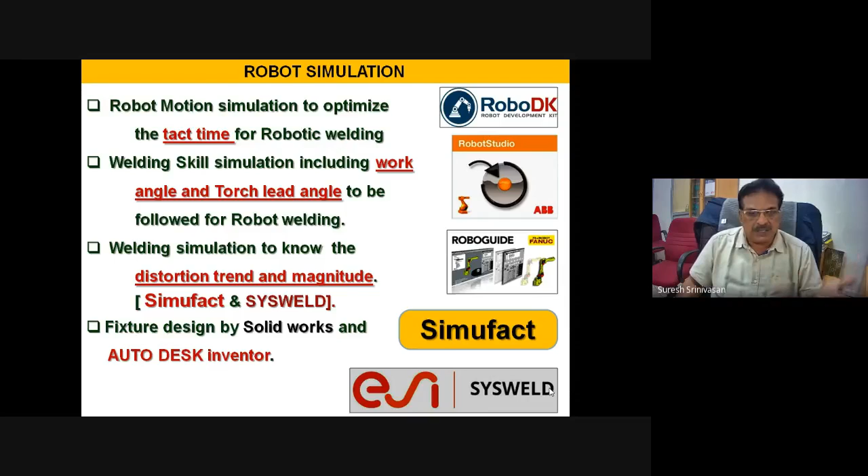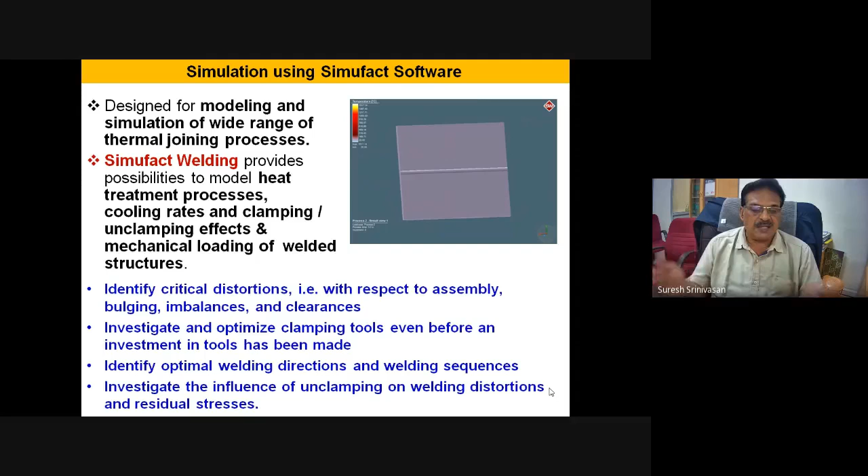And we also simulate with SimuFact. We have SysWeld, etc. to identify critical distortion, investigate and optimize clamping tools, etc. before we start welding. As I told you, we use SysWeld for predicting the core assembly deviations in the dimensions by thermal visualization.

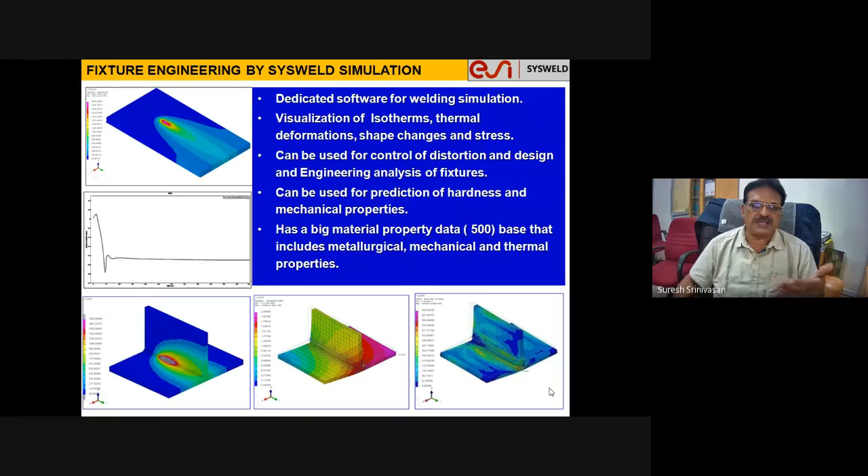Stress analysis, etc. is done. So these are some of the parts which we have done for robotic simulation using SysWeld.

Remember, robot is a manipulator. The heart of the system is the welding power source. Robot only guides the torch, it does not weld. Only the power source welds. Robot cannot replace a man completely. It does only part of the operation. It does not get fatigued. That is its greatest strength.

We require intelligence to do certain specific root welding, multi-part welding, etc. Robot does not provide intelligence. Sensors and other peripherals provide all these; power source and sensors provide intelligence.

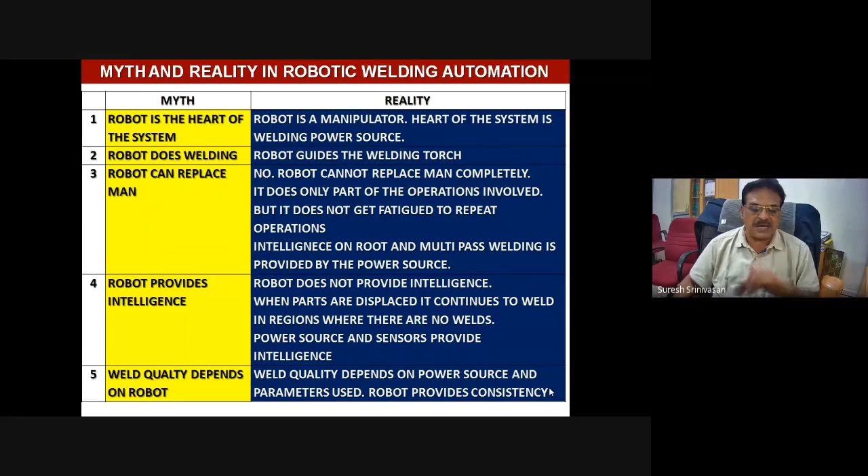Welding quality depends on power source and parameters used. Robots provide consistency. Is the robot the most important component of the system? No. Fixtures, positioners, power source, sensors contribute to quality and are equally important.

Is the costliest component the robot? No. Fixtures, positioners, subsystems, and sensors are more expensive.

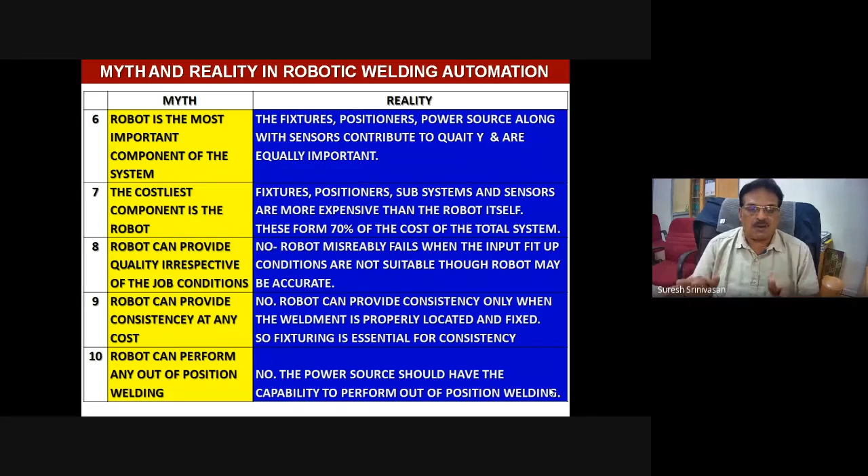Can robots provide quality irrespective of the job? Absolutely wrong. Robot miserably fails when the input fit-up conditions are poor. Robot gives you accuracy and quality only when you have the positioners and other subsystems. Robot can provide consistency only when the weldment is properly located and fixed.

So fixturing is mandatory. Can a robot perform any out-of-position welding? No, the robot only takes the torch to the position. The power source has the intelligence and the capacity to perform out-of-position welding.

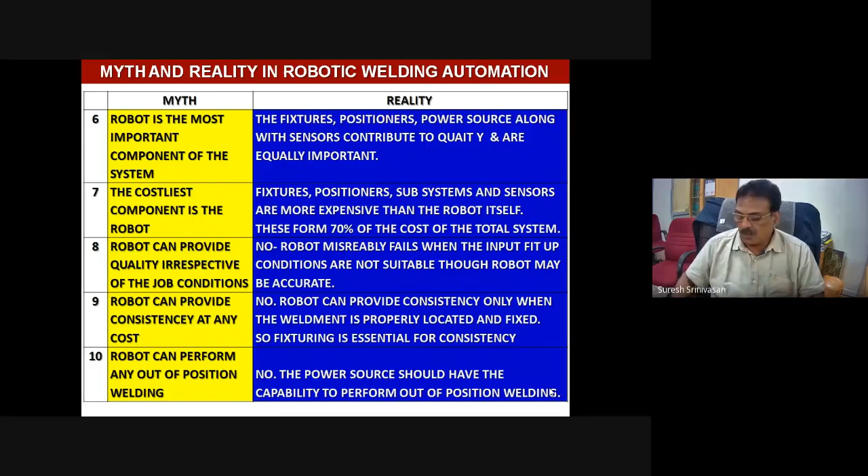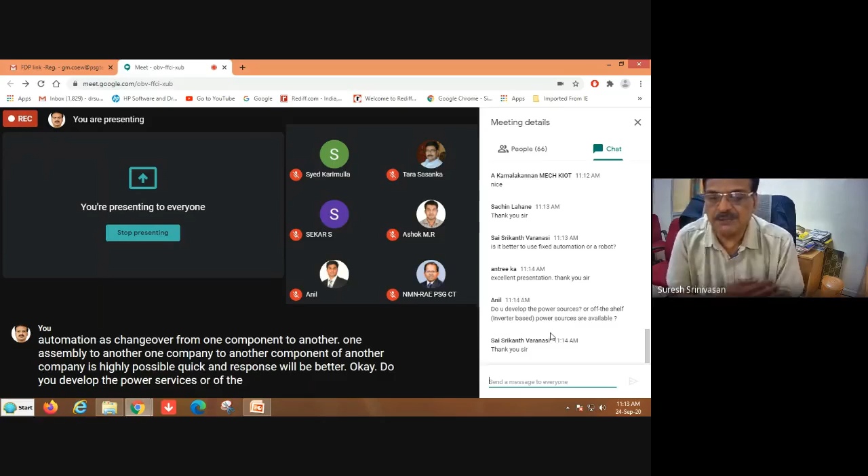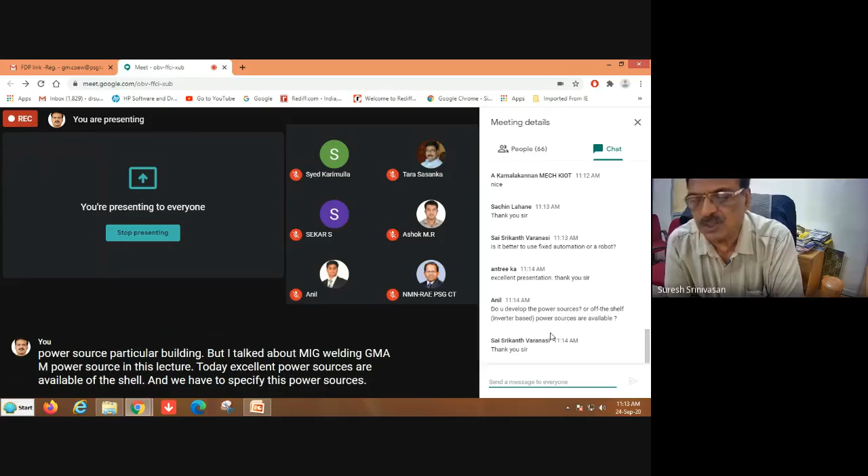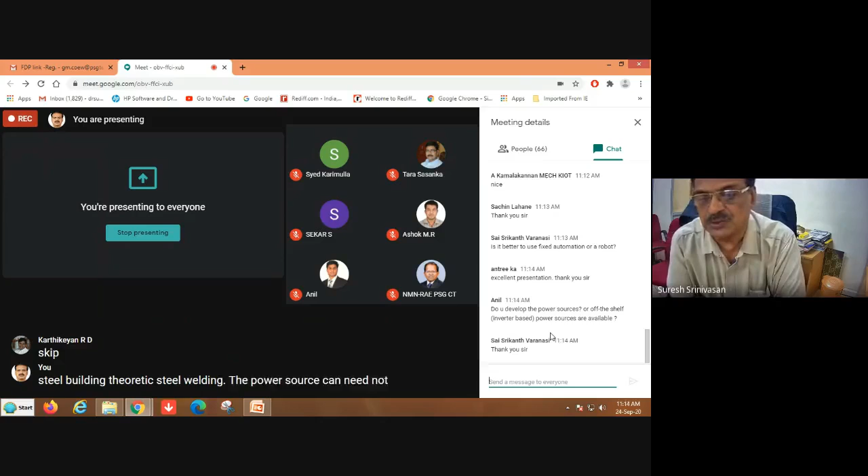Do you develop the power sources or use off the shelf? We have developed a power source which is a programmable power source for TIG welding, but I talked about MIG welding, GMAW power source in this lecture. Today, excellent power sources are available off the shelf, and we have to specify these power sources. Suppose you are going to use this power source for aluminum welding, titanium welding, nickel welding, steel welding, the power source has to have all these capabilities. Suppose you are going to use only steel welding, ferritic steel welding, the power source need not be that high-end. So this requires direct dialogue with you about what kind of application you are thinking of.